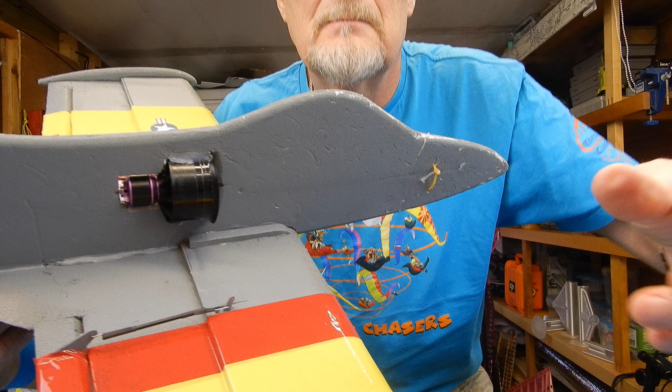New wing software, so let me tell you the story. If you're new to this channel, the previous video was me test flying this, a simple climb Fogelman, and I wanted to muck around with two bits of wing software.

One I'm going to show you this week because I've really cracked on. I joke on the Angel Wing Designs website that I basically use a crayon when I send my designs, if they're any good, to Andy.

But I've got this thing called Wing Helper, which I've really enjoyed and got a little bit addictive. So what I'd like to do, as was always the plan, is make up a built-up version for this plane.

As it happens, because it was so successful, Andy from Angel Wing Designs has very kindly made me and cut me a whole new fuselage. When we get to the build of that, we'll talk around the reasons for that.

The reason for this video is I'm going to talk you through it, but I'm no teacher. If you want to learn about ears, I might be quite good at teaching you something about that, but when it comes to CAD design, it's not me - I'm a complete newbie.

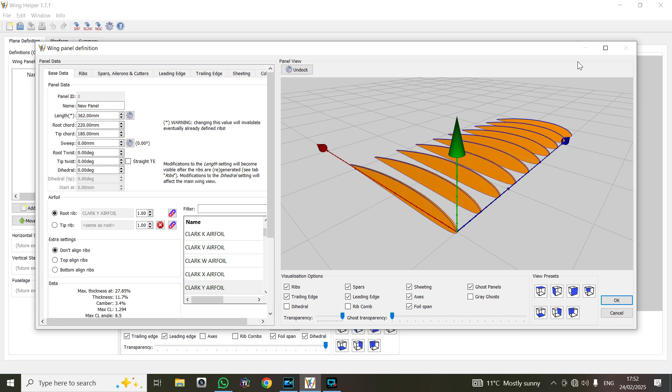So to start off with, I'm just going to make this full size, and the first thing Andy taught me is to make sure you write something in the name field. So where it says name here, I've written Panther, so I won't forget it.

Now what we're going to do is copy the dimensions of the Panther Decline Fogelman wing. We'll scroll down to the length, and the Panther wing is 400 - you can either write these in or scroll through. I've only had this software for about a week - worth remembering you can have it for 7 days as a sample or test.

The root chord - you'll notice that nothing's actually happening on screen at the moment, although I've changed the chord. I'll show you what's going to happen in a moment. So the root chord is 250, and I've put the span in.

So we're just going to change the tip chord as well. Remember, I'm just copying these all from my Panther. The tip chord is 160, and we're just going to come down there like so. And then what's going to happen is, at the moment I just want to show you that bit first.

Now I'm going to go up here to ribs, click on the ribs, and you see where it says generate ribs. Watch what happens to the wing. The wing has now moved. And that's an important thing to remember whenever you're mucking around with the ribs or with the span. You'll have to go back and just click generate.

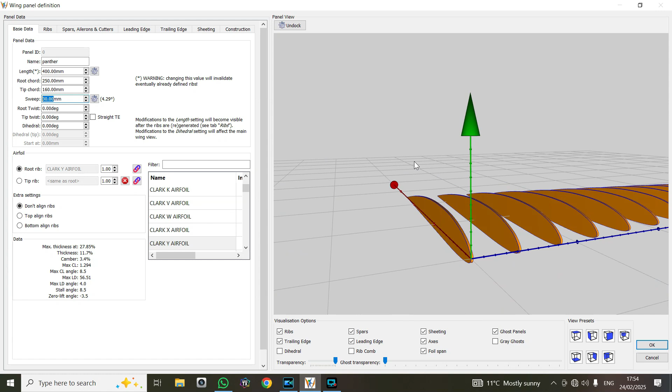See what happens. Now if I just show you what we've done already, so I'm now holding the left button down and I can now move this around like so. Now a little top tip here which I discovered, it might not be everybody's mouse settings, but if I hold both of the buttons down on my mouse, I can actually move the whole thing about, and that might be important a little bit later as we go along.

Now I've also decided just at the bottom here, I'm just putting 2 degrees of tip dihedral, but if you just watch this wing and if I just add the dihedral and then go to the ribs, I go back to base data, and if I go down the bottom, this bottom tab here, and then click dihedral, it's actually showing the dihedral.

So all of these arrows here, if you unclick them, that certain object will disappear. Obviously we've got no trailing edge at the moment, so I'm just going to go back to my original dihedral, which was, you can see it's moving at the moment. I'm going to go back to the 2 degrees, and at the moment I'm taking that off. It's there, but it's just not visible. So I'm quite happy with that.

And the only other thing that we need to do now is this bit that says aerofoil. And at the moment, to keep life simple, I'm using the root rib, and the tip rib is going to be the same. When we get a little bit more expert with it, possibly we could actually change those parameters, but at the moment I'd like to leave those parameters as is.

Now this here, the aerofoils, there's about 1,000 aerofoils, and what I have noticed is that actually you can just type them in small groups. So if I type in RG, all the RG airfoils, the groups of them will come.

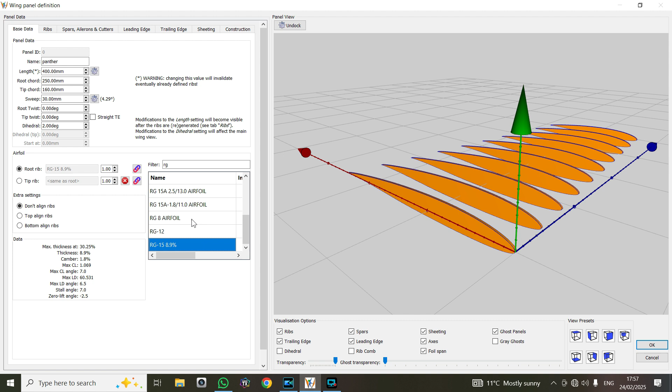Now I'm actually using this one here, RG 15, 8.9%. I'm using that one, and did you see how the rib changed? So if I go to a different one, that's changed, but I'm going back to that one there. So basically that's us got ourselves a wing.

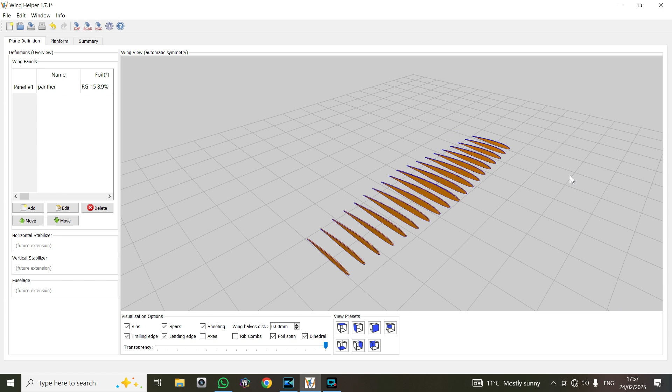And the other interesting thing is, let me just show you something. If I go down to OK in the bottom right hand corner and click there, that's going back to the first page, and you'll notice now we've got a whole wing set up. Looks very much like a Panther to me. Also in the name it has, obviously we've got Panther, and it's an RG 15, 8.9%.

So I am going to go click on here and then go to edit. We're back on that page. Now the next thing that we need to look at is going to be the ribs.

So I'm now going to click on the ribs here. So this is all to do with altering the ribs. So the first thing I need to do is I want to change my ribs to 2.5 millimeters. So this here is the thickness of the rib, and you can change how many ribs you want.

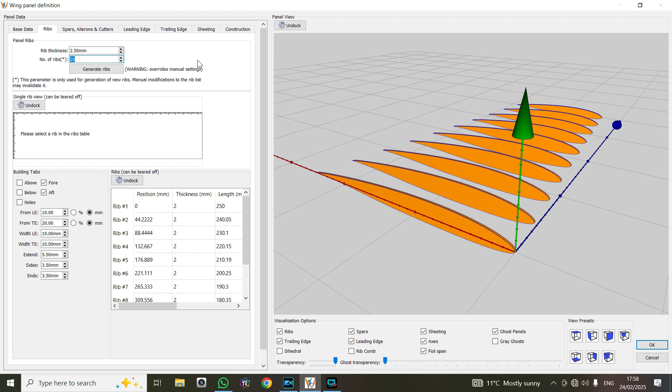So you can either do this manually, but look, if I type in 20 here, which is double, if I click generate the ribs, it's going to ask me, do I want to proceed? And there you go, we've whacked in a load of extra ribs. So what I'm going to do there is I'm just going to go back to the 10. I'm not going to make this over difficult, but let me just click on there. There we go, back to my 10 ribs.

Now the other interesting thing is that if I click on rib number 1, I am going to keep this dead simple.

In this bit here that says building tabs, if I just click here, look, we've now got these building tabs, so if we want to jig our wing in any specific way, or if we had washout, all these tabs would be cut to suit.

I'm just going to check this, and you can actually alter these if you want. So if your leading edge is too close, you could just change it here. You can change the area of the trailing edge one too. Let me show you - if I'm just moving this one, you'll notice that it's moving down the rib like so.

All I'm going to do is go back to here, because I'm quite happy with this one. Oh, what have I done there? I'm going to go back to 10 like so, and that basically is my ribs sorted.

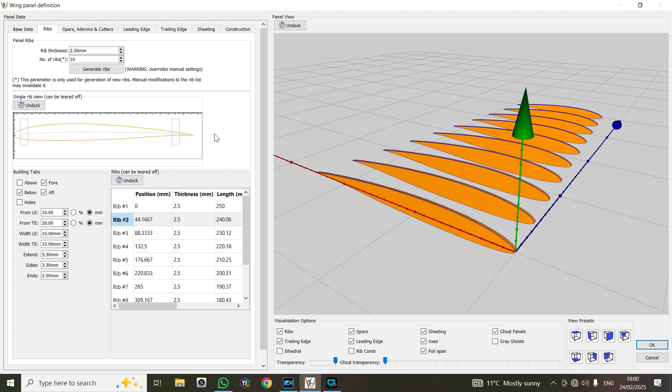That's our ribs done. So the next thing we're going to do is go to spars, because we want to put some spars in. So all I'm going to do is just highlight that there.

I've just clicked underneath, and it says spar in front or spar behind, but this one is going to be our leading edge. Let me just show you that there.

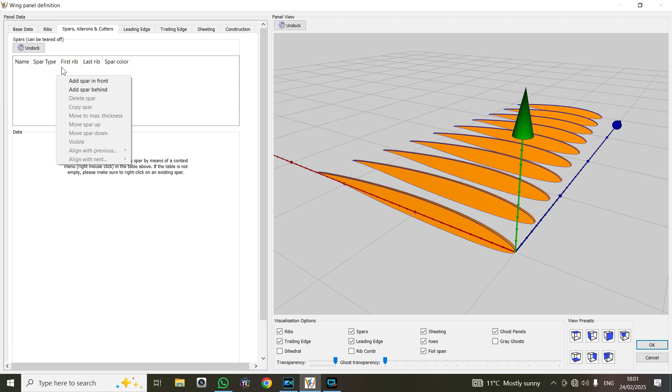If I put that in front, now obviously that's massive, but let me show you, if you just look at the dimensions here, if I just move, I can actually move that backwards and forwards, and it will just follow the path of the rib.

Now this particular one that we want to do, I'm going to change the radius to 3. And what I want to do is just bring this right to the front. So this is at 2.5 away - I've got this as a percentage, but it's also 2.5 millimeters.

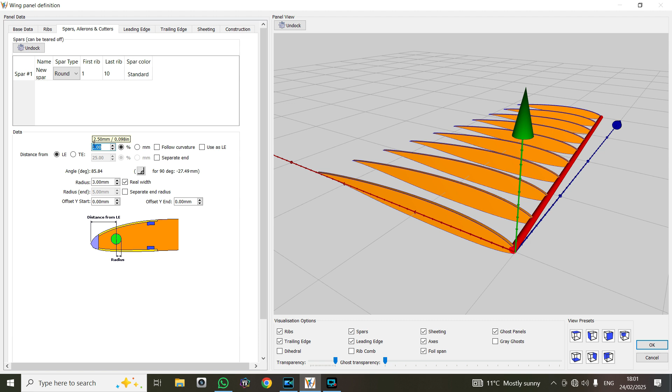Now if I just quickly scroll in here, hold both of these - look, if we scroll in now... there you go, look at that. It's almost - I'll tell you what.

Now what we need to do here is I just need to write in here 'leading edge,' because Andy will never forgive me if I don't, so I'm just going to type enter. So that one is round, so let's just come back out of here for the moment.

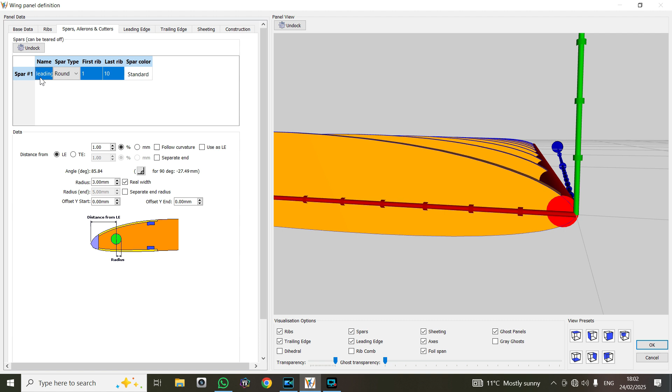That's superb. Now the next one that we're going to do - let me just have a little look at this, that's the leading edge. Actually, if you look, if I click on here, you can actually change the shape of that spar. I've clicked on where it said round, and there's wing joiners, webbing, rectangle.

So if I click there, it will change to a rectangle if I alter it. But let's just go back there - I don't want to get too clever. And then you can actually have a balsa leading edge if you wanted to. So I'm quite happy with that.

I'm now going to add another one, and this is going to be our main spar. So I'm just going to click add in front, and then what we're going to do is I'm just going to look at that one.

And then what we'll do is I'm just going to change this one, again, to 3mm - that's the radius, I'm changing the radius to 3mm. And then what we want to do is just change that.

Let's go back and go right, new spar. So I'm going to click on this spar, and then I'm just going to write in here 'main spar' like so. Now the other interesting thing is, if you want to, you can actually change the height of this.

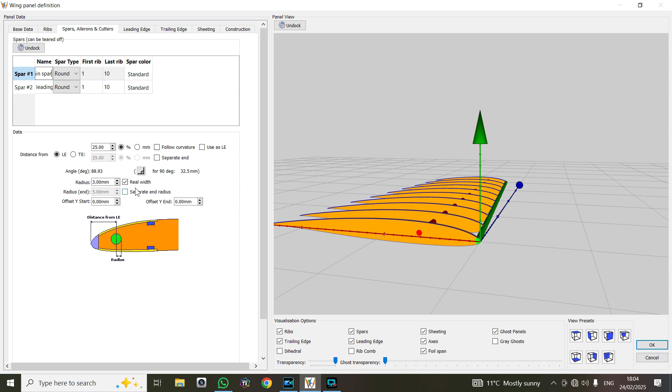So if you pull in here, you can actually change the height and position of these if you want to. If you've got this Y axis here, I'm clicking on the Y axis - can you see it's going down? So if you wanted to increase some angles, you can do that. I'm just going to keep it dead simple and bog standard, right in the center, and I've got it at 25 percent. There we go, so that's basically a leading edge.

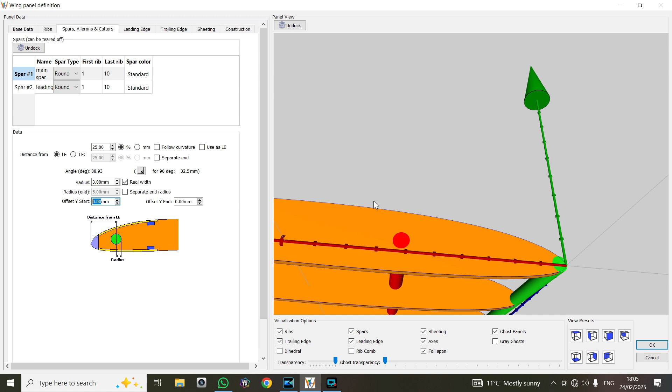Now one last thing I am going to show you, let me show you something quite interesting here. If we click on there, we can get rid of the spars, but look, here's your hole - it gives you a good look round to see how things are going. I click back down on the spars, and the spars are there.

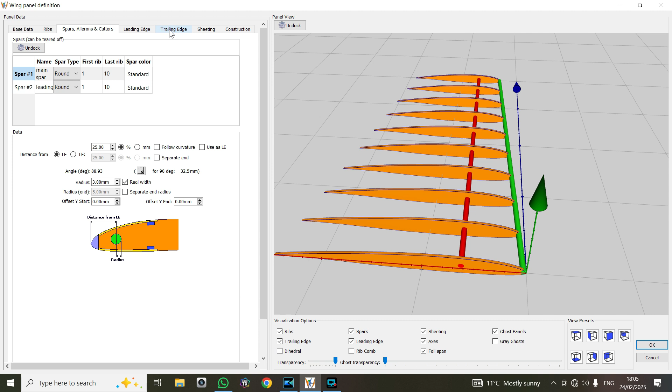So the next thing we've got to look at is just going to go to trailing edge. This leading edge here, I'll be honest with you, what I've done is I've just ended up using the spars, ailerons and cutters, and that's worked for me. So for trailing edge, I'm just going to click on here, so standard sort of depth.

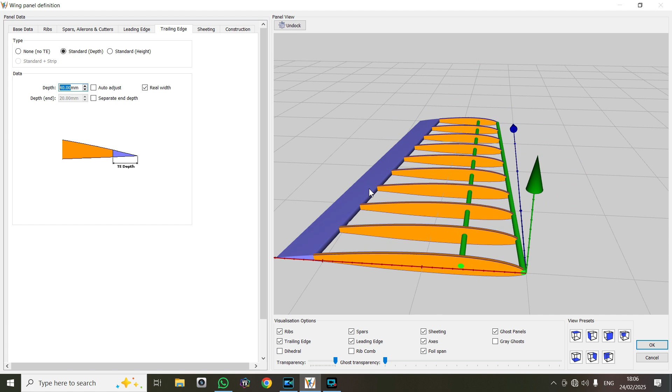There we go, and what we're going to do for our trailing edge, I'm going to make this 40. That's our trailing edge. Now what's going to happen is when this actually cuts this file, it means it's going to finish this edge here at 40 millimeters depth, which means I can then put a false trailing edge along here. You can do your own false trailing edges if you want, and if you watch some of his videos, he'll even do hinged ailerons as well. But I am just keeping this simple.

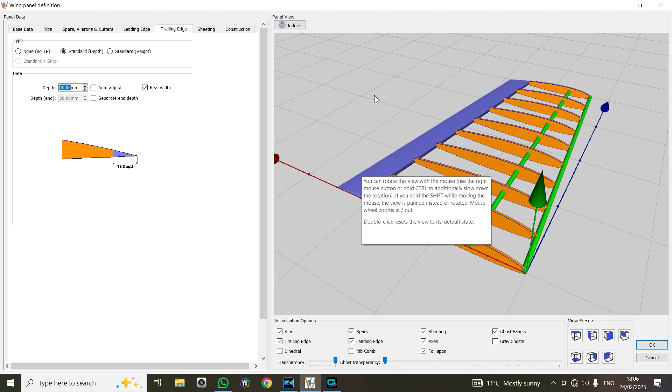One last thing I want to show, so that's the trailing edge done. One last thing I want to show you with these spars - if I click spar behind, and then I'm going to click on here and change it to a round joiner. Okay, that's the round joiner, that bit there.

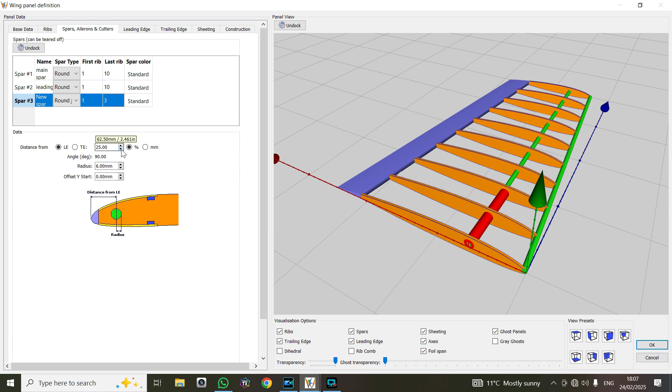Now at the moment that's 1 of 10. If I click on this 10 here, and then what we'll do is change that from 10 to 3 like so, click enter - boom, there we go. Now what I can do is, if I'm going to change this one, another one is going down to - oh hang on, sorry, wrong way. I'm going to go down to 3 millimeters there. Now watch what happens, I'm going to give you a little tip here.

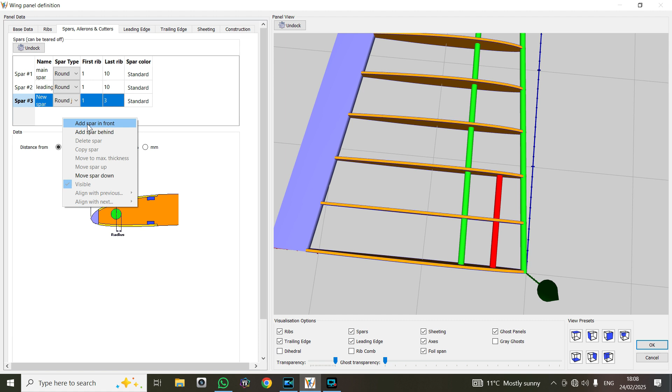So this has become a wing joiner. Now at the moment, I can do one wing joiner there, and then I can do another wing joiner here. So if we wanted to, we can just click another one, add spar behind, and change that to 3. Again I'm going to change it back down to the radius is 3, and then all we're going to do, if I increase this, is now going where I want to.

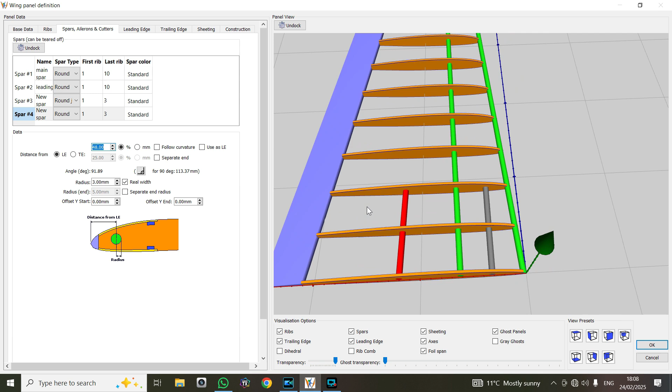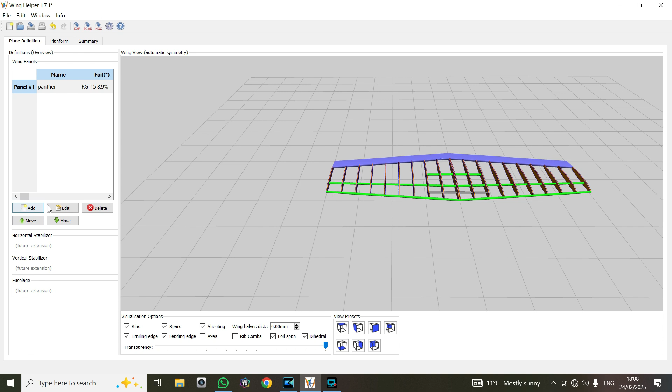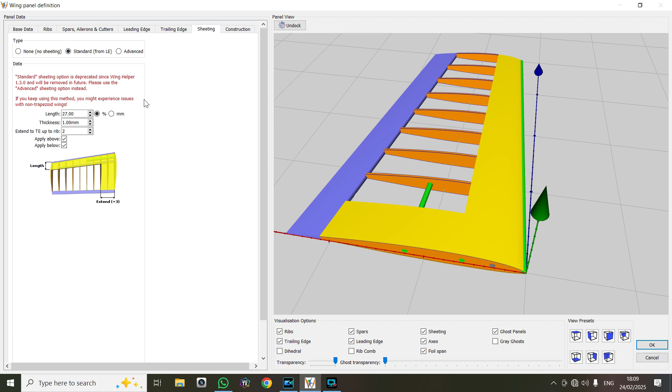Now the only other thing we need to do, which is very clever, is going to be some sheeting. So I'm just going to click on here - I'm going to do standard sheeting from the leading edge, and this is a preset setting on here which has automatically done it. So if you wanted to change it, like if you had a webbed spar, then we could actually change this. Now I'll be honest, I've kept this simple. In the actual design I'm going to change mine, which I'll talk about in the construction. But that now is standard, so the thickness is 1mm.

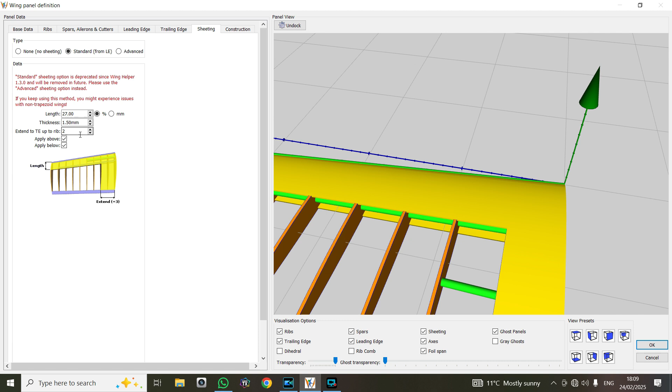So let's just change that to 1.5mm. You can change where it extends to. It says it extends the trailing edge up to rib 2. Well, if we wanted to, because we've got the spar, we've now covered the wing joiners, because I've gone from extending the rib from 3, and if I go back down, we could go to 4. You could sheet the whole wing, but if I go down to 2, there we go. So I'm actually going to go up to 3.

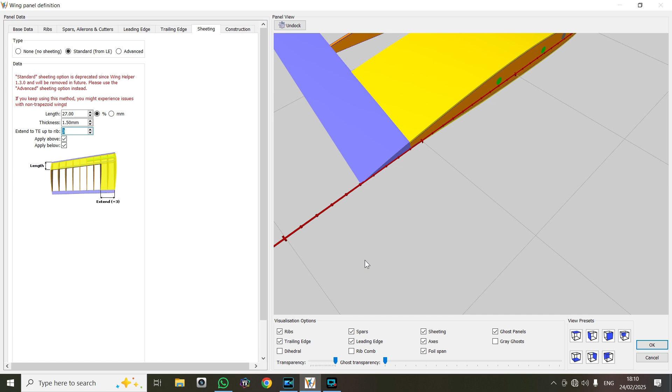If I just rotate this, it's done top and bottom. Absolutely superb.

If you want to, you can adjust it though - if you go to the advanced settings, you can adjust those, but just to keep life simple, because I am a very simple person. Look at that, so we're happy with this.

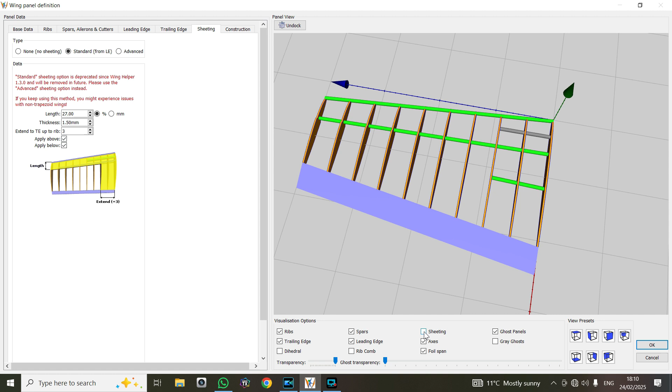What we can do is, if we unclick the sheeting here, just having a little look at that, we can put the sheeting back on. And there are other things that we can add to this, but I wanted to keep this dead simple.

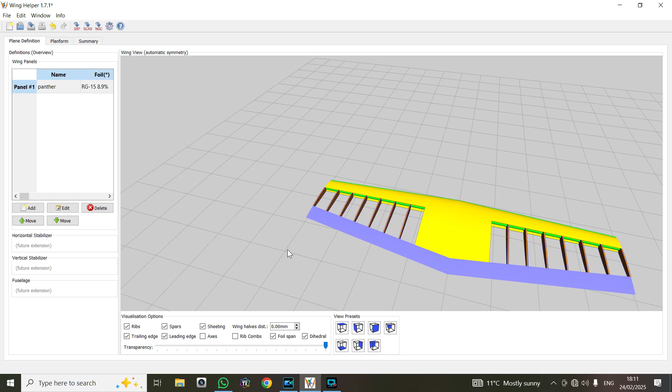And also you get to say things like 'get to the chopper.' So let me just click on here. Okay, now look at that. Come on, that looks like a panther wing to me. Now let me just show you something here - if you want to, if you just click on here, you can actually just split the wings.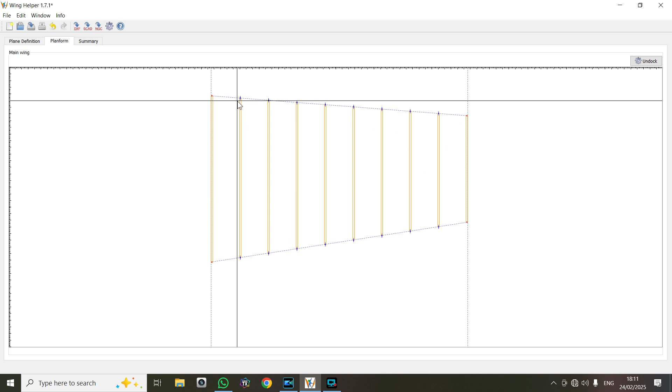Also on this page, if I go to plan form, let me just scroll out, it will actually show you a plan form. In a more advanced thing, we can start moving these ribs about, but let's just keep it simple. There you go, that's our wing.

Now all I'm going to do now is show you the slightly more advanced version that I did, where instead of using a carbon fibre tube, I've used a notched leading edge with these building tabs on the ribs.

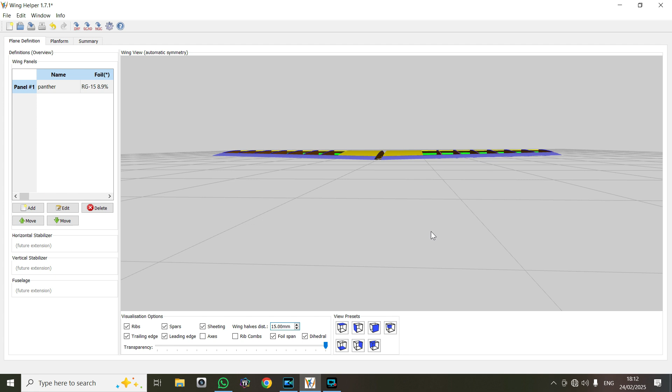So let me just show you what we were talking about. It doesn't show them, but the building tabs are there. So if you click on a rib, these building tabs are here. So I'm really happy with that. I hope that hasn't been too long or too boring for you.

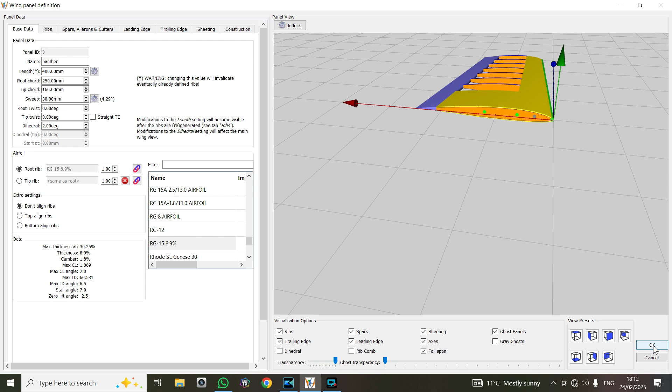So now what we're going to do is I'm just going to say OK on here. Really pleased with that. You don't have to split this wing, by the way, but it's just something if you want to. Good tip here is, if you take away the sheeting, you can just check to see how everything lines up, so just worth remembering that. If you want to, you can just take your spars out, and that's what you've got.

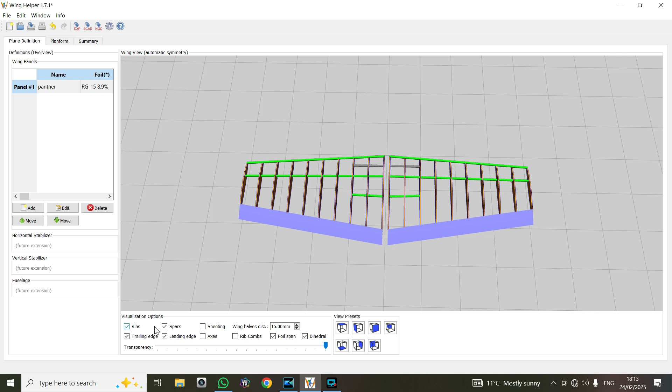So all I'm going to do now is click on this here. It says DXF - I'm going to export this DXF file and send that to Andy, and let's see what happens.

Right guys, I've done it. That's my first wing. Now I hope it wasn't too boring, I hope I wasn't too quick, but that literally is the second wing that I've worked on - I worked on one just talking through it with Andy.

I've got to be honest with you, I think it's a German guy that's got the Wing Helper website, his YouTube channels are brilliant, and I'll tell you what I did. Got it in front of me on the flat screen TV when the wife was having a bath, got the laptop, looked at the software and just followed along.